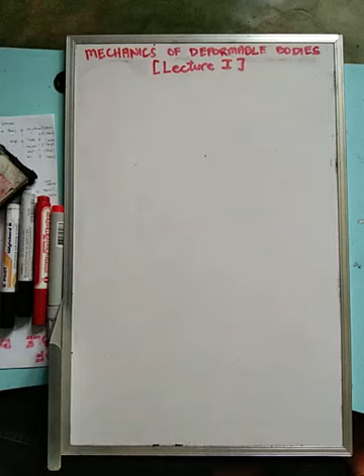Hello class, so this video is our first lecture on mechanics of deformable bodies. Basically, this course, ES17 or mechanics of deformable bodies, has something to do with the strength of materials.

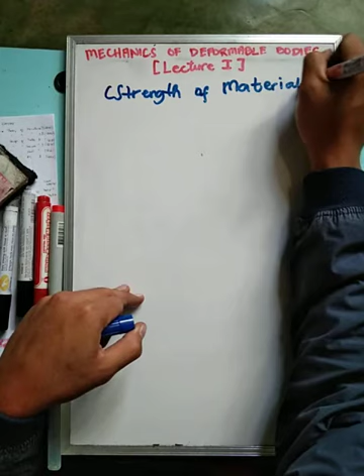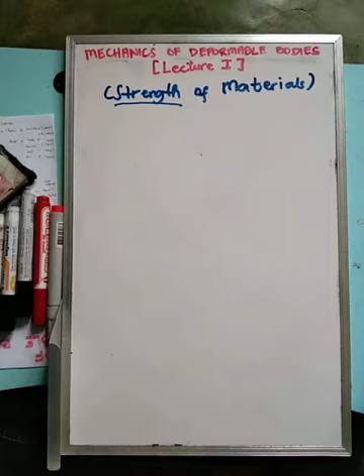But generally, looking at the bigger picture from the word itself, strength, this subject's main analysis is analyzing the strength of a given material, considering how it will behave despite the application of load to its own body. How will a material behave after a load is applied? Will it break? Will it deform? Or what? So that is the main concern or main study of this subject, which really plays a greater role and is very crucial in your higher majors.

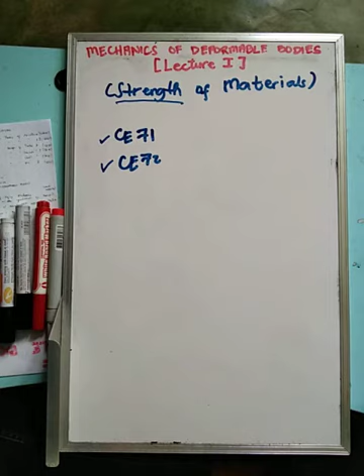For example, CE71 and CE72. These are all reinforced concrete designs, in which what we analyze here is how a structure consisting of concrete as its main material will behave, or how it will resist the loads applied to it. So mechanics of deformable bodies affects this course because in these subjects, CE72 and CE71, it's about how strong the concrete we used is, or how we design concrete so that it will not break or deform in the near future.

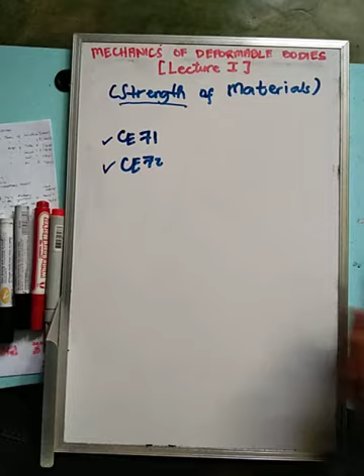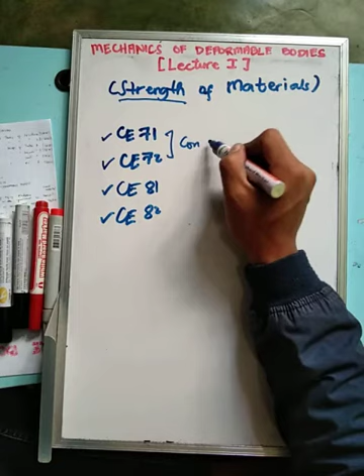Same thing or same story with your CE81, which is timber, and CE82, which is steel design. The material here is concrete, here is timber, then here is steel. So basically, these three are all designs in which the material is concrete, timber, and steel respectively, and what we design is whether these materials can withstand, or can resist, the force we apply to them.

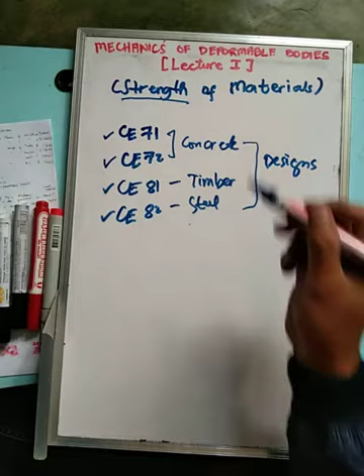So as I've said, this subject, the strength of materials, is very important, so you better not miss some discussions with regards to this topic.

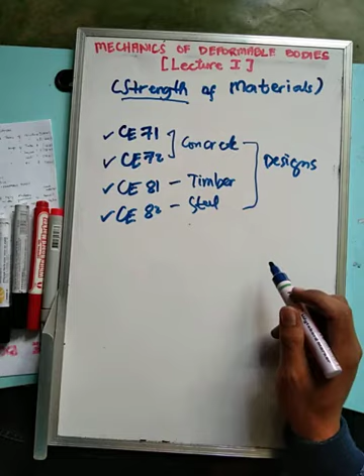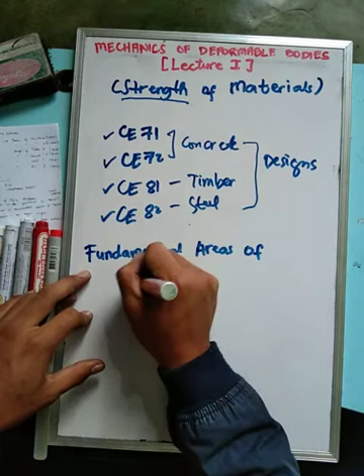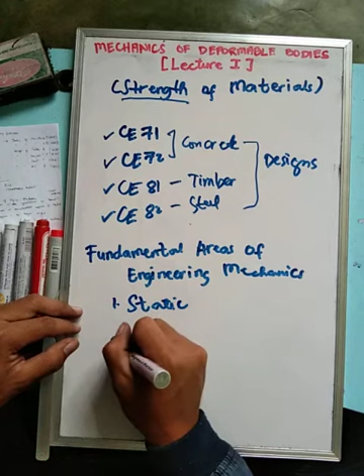So basically, it is mechanics. Speaking of mechanics, there are fundamental areas of engineering mechanics. This is just an overview because I know you have already taken your ES11, which is your mechanics of statics. The second one would be mechanics of dynamics, and the last one would be the mechanics of deformable bodies.

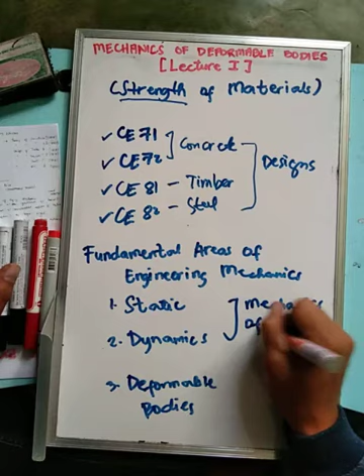This subject is deformable bodies, but let's see the difference. As I have said, you have done your statics, ES11, in which its main concern, and these two's main concern generally, is the analysis of mechanics of rigid bodies. From the word itself, rigid bodies, it does not really consider the deformation of a material after a load is applied to it. In statics and dynamics, which are mechanics of rigid bodies, after a load is applied, it doesn't cause deformation, so that's not considered. But in deformable bodies, deformation is being considered.

So that is the difference between these two. Again, in mechanics of rigid bodies, there's no deformation. All you need to do is analyze whether the structure or the support can withstand the given load. On the other hand, in deformable bodies, what we consider is whether a material will be strong enough not to break or not to deform.

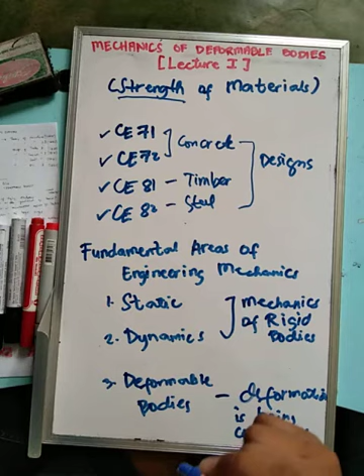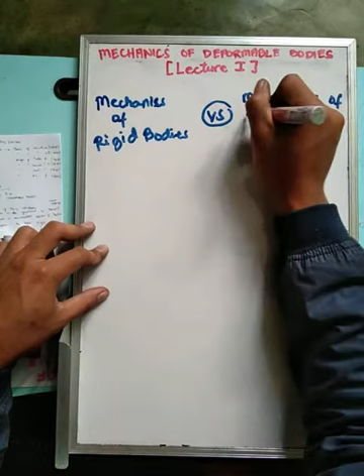Let's look into an example of the difference between these two. Now let's give an illustration to give you a better and clearer picture of the difference between mechanics of rigid bodies versus mechanics of deformable bodies. So here's the difference, guys.

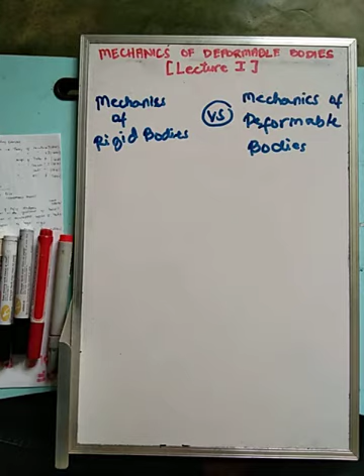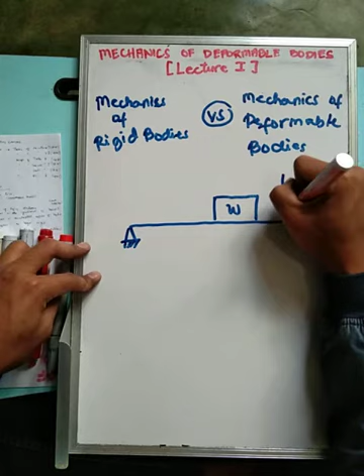For example, we have this given support. What is this? It carries a load weight W. There is a support carrying weight W, and there is another support P here. Listen, in mechanics of rigid bodies, the main concern is with this support P - can this support P carry the weight W? That's it. Will this support P be able to carry the weight here? That is the concern of mechanics of rigid bodies.

On the other hand, in mechanics of deformable bodies, can the length L, can this span, carry this load without causing deformation?

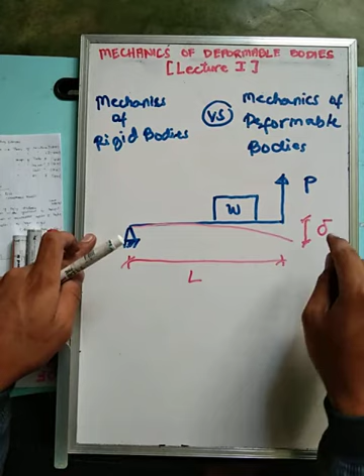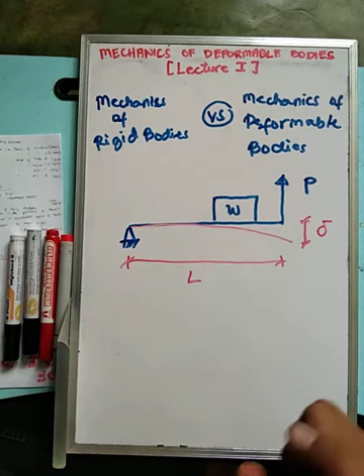So that is the difference between mechanics of rigid bodies and mechanics of deformable bodies. Again, sa mechanics of rigid bodies, deflection or deformation is not being considered. Kasi kahit magdeform, hindi ito isinasaalang-alang. Pero sa mechanics of deformable bodies, isinasaalang-alang natin ang deformation na maaapektuhan. So pero generally, at the end of the day, sa higher mechanics, we always consider deflection.

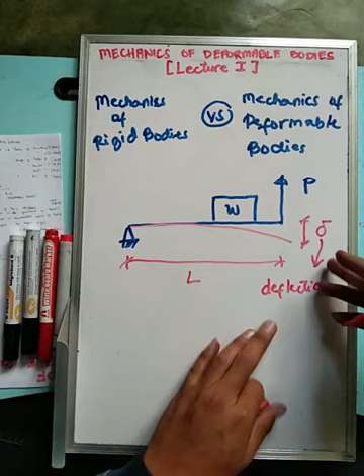Ang notation para sa deflection, delta, ay denotes deflection. We will see lots of deflections in our future videos. Now, let's proceed with simple stress.

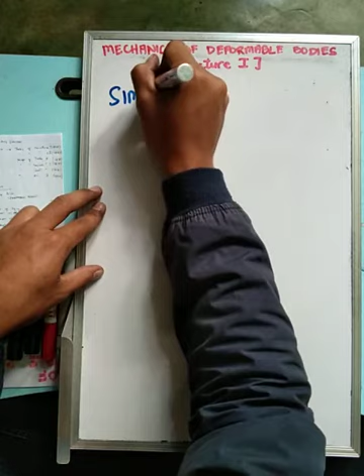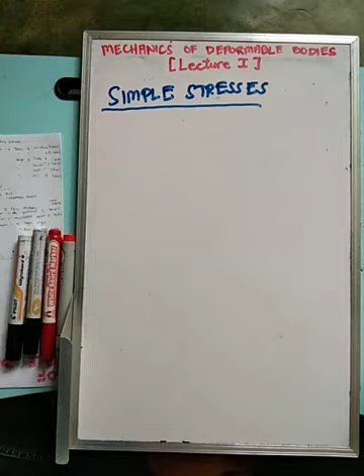So this is where we'll begin discussing stress in engineering mechanics - not just in engineering mechanics, but in engineering courses as a whole. Simple stresses: the force is perpendicular to the cross-sectional area. Again, in simple stress, the force is perpendicular to the surface area.

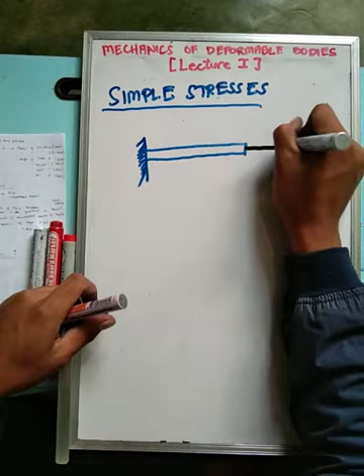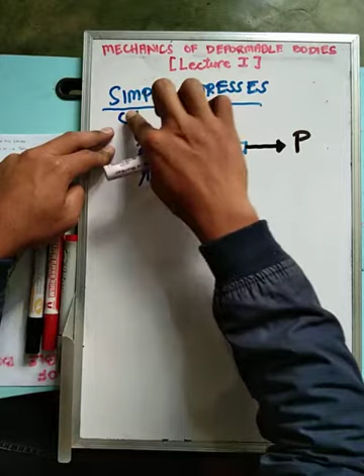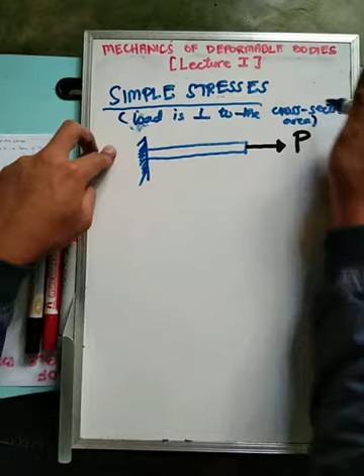Again, ang sabi dito ay perpendicular daw - perpendicular, or load is perpendicular to the cross-sectional area. Sa simple stresses, load is perpendicular to the cross-sectional area.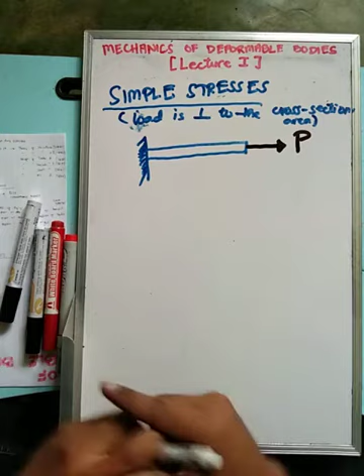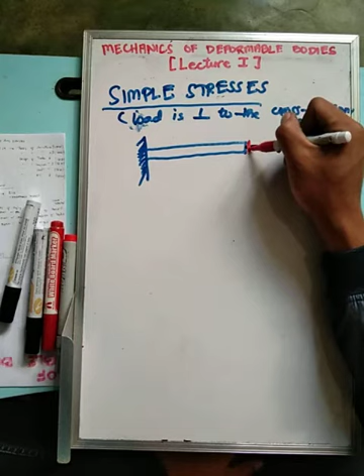In this illustration, we have this support with the applied load P. So ang applied load P na perpendicular to the cross-sectional area ay ito - applied load, perpendicular to the cross-sectional area, and this is the area.

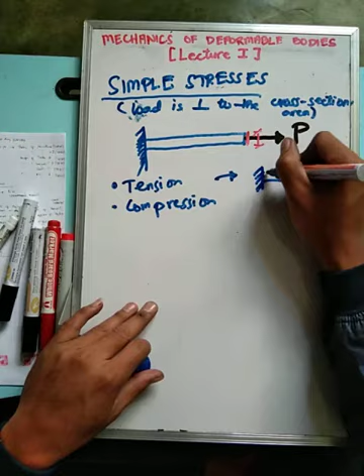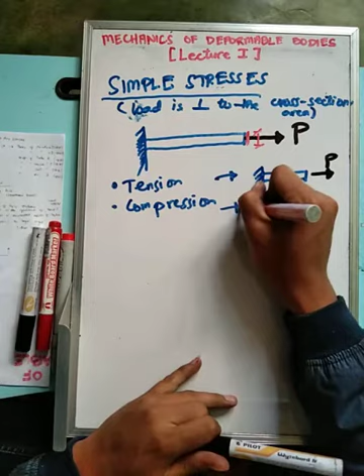At the same time, sa simple stresses, it's either tension or compression. For example, sa tension, load dito, support dito - this one is in tension, while this one is in compression.

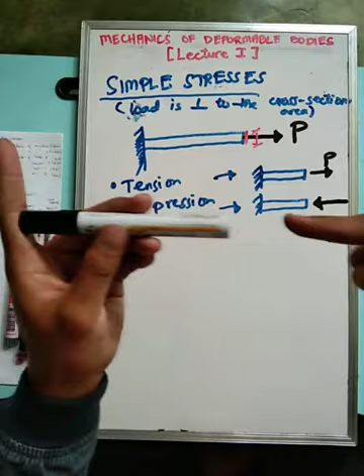These are the two parts of simple stresses - it's either tension or compression.

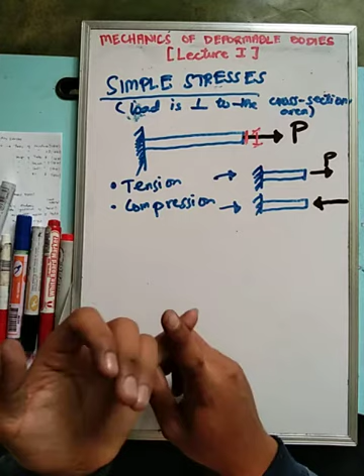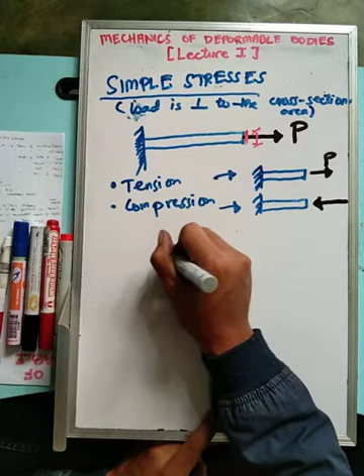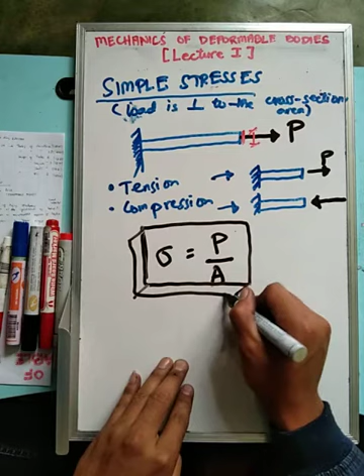Another thing is its formula. The formula that we will be using is sigma equals force over area - force, meaning the load, over the cross-sectional area. And that is the formula to consider or to use when analyzing simple stress. Again, sigma is equal to force over area.

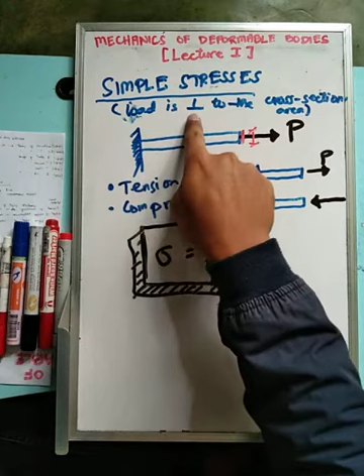Again, in simple stress, the applied load is perpendicular to the cross-sectional area. Do not get confused - again, perpendicular. This is the load and this is the area. It should be perpendicular, because next we will be considering parallel, and that is a different story.

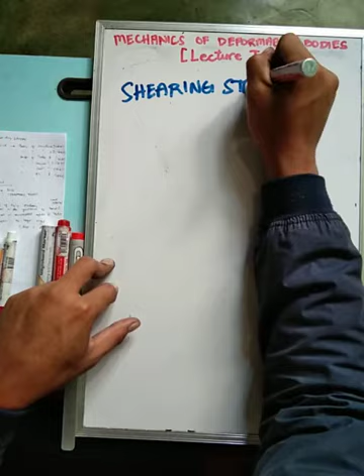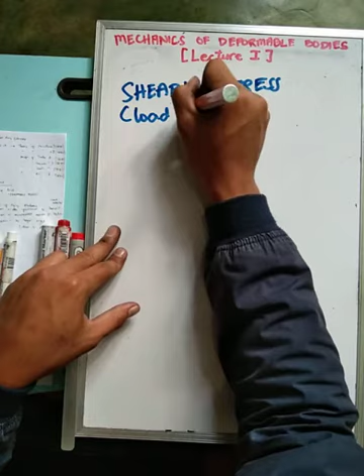So let's proceed with shearing stress. Earlier we discussed axial or simple stress, which is perpendicular. This time, the load is parallel to the cross-sectional area.

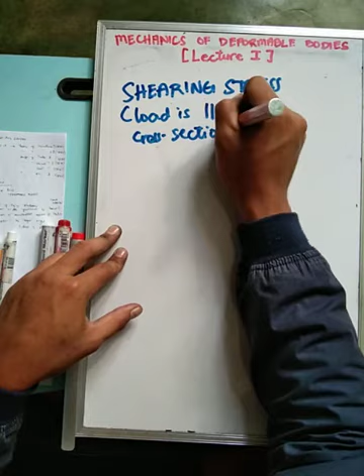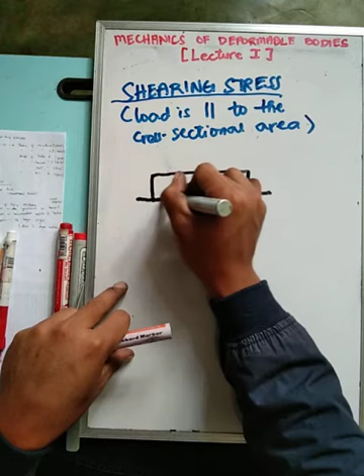So in simple stress or axial stress, the load is perpendicular. But this time in shearing stress, the load is parallel to the cross-sectional area. Again, parallel. Given this illustration, there is this material, after which you apply the load P.

As we said earlier, the load is parallel to the cross-sectional area. So in shearing stress, our cross-sectional area is here, and that's where it fails - imagine it being compressed or pressed. So basically, that's where it fails, and this is the parallel cross-sectional area of the load P. To give you a better understanding, for example, using a notebook and an eraser.

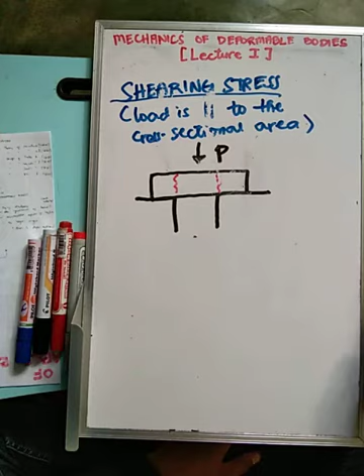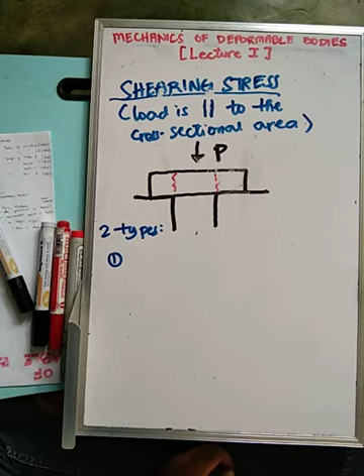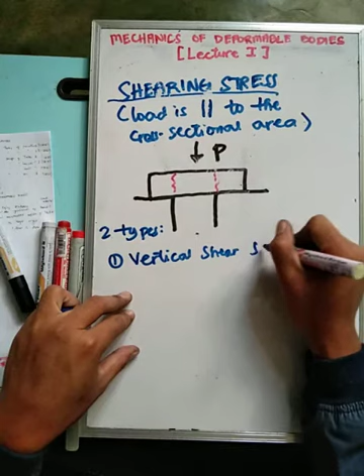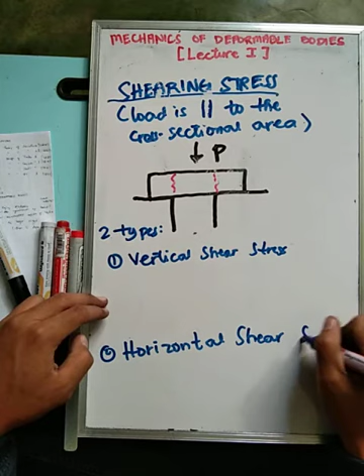But basically, sa shearing stress, there are two types of shearing stress. Vertical shear stress and horizontal shear stress. Okay, these are the two types of shearing stress.

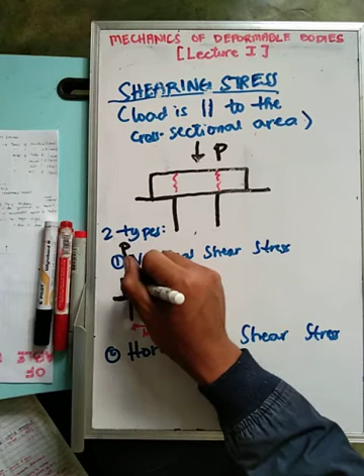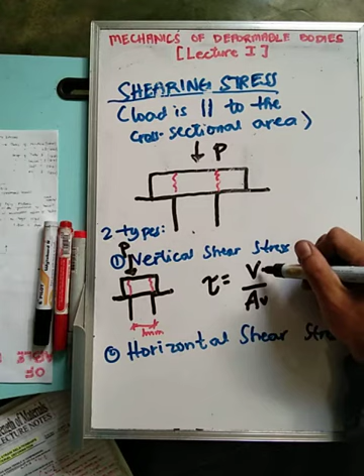So that is the vertical shear stress, which has the formula tau is equal to V over AV. V over AV, where V is the shear force over the shear area. Shear force is also denoted as P, but we use V as the notation to denote that this is a shear force, which is the load.

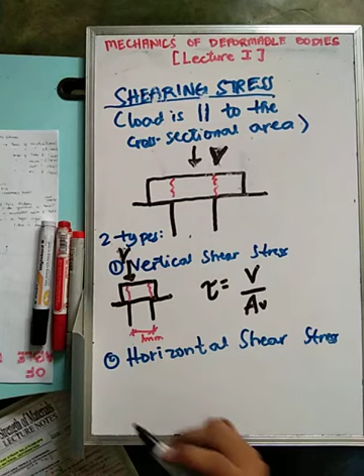Again, the formula for vertical shear stress is tau equals shear force over shear area. Again, vertical shear stress is parallel, but see the difference, see the difference, for example in this condition or illustration.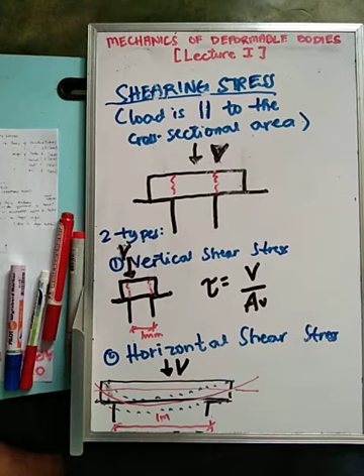And that is the horizontal shear stress. The analysis is still simple. Imagine if the supports are closer together, it's like vertical shear stress, but in horizontal shear stress the supports are far apart, and the failure occurs through deflection.

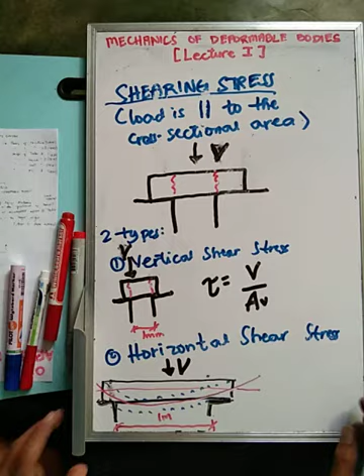Again guys, in our class on mechanics of deformable bodies, failure of a structure is one of the key analyses to pass this course. So again, in vertical shear stress, our failure is vertical. Same analysis applies to horizontal shear stress, except here the failure becomes horizontal due to the long distance between the two supports.

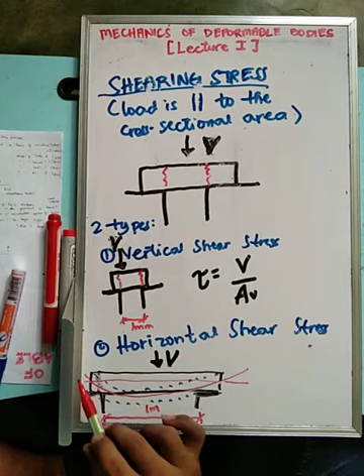So basically, in horizontal shear stress, deflection occurs because the two supports are far apart. In vertical shear stress, the supports are close together, so failure happens right there. In horizontal shear stress, deflection occurs because of the long distance between the two supports. Now, the formula to use here is no longer tau equals V over AV.

It's already this one: FV is equal to VQ over IB. Just check your notes, look in your handouts for what V, Q, I, and B represent. Basically, in horizontal shear stress, V is the load, Q is the static moment of area, I is the moment of inertia, and B is the sheared length.

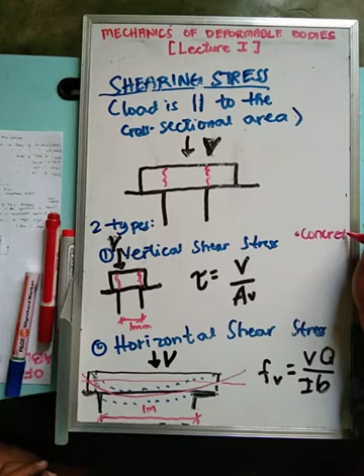Normally, in vertical shear stress, this usually happens in concrete and steel. Why? Imagine concrete that cannot bend — it will automatically break both sides. Usually in concrete and steel, when it cannot bend, it automatically breaks, for example without bending.

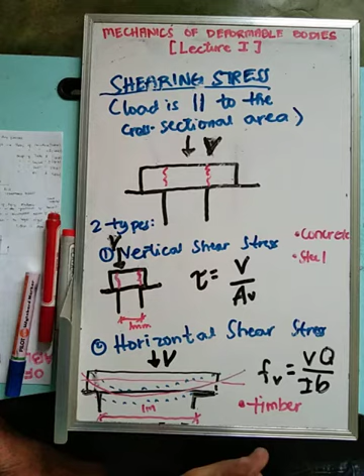But on the other hand, in horizontal shear stress, we have timber, where when you apply a load, there is a high chance of deflection. Unlike concrete, where applying a load automatically causes it to break. That is the usual application: vertical shear stress applies to concrete and steel, where applying load causes it to break. But horizontal shear stress applies to timber, because when you apply load, it will just basically deflect or bend.